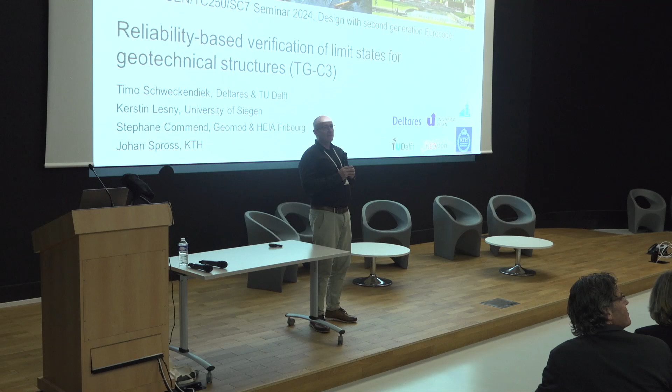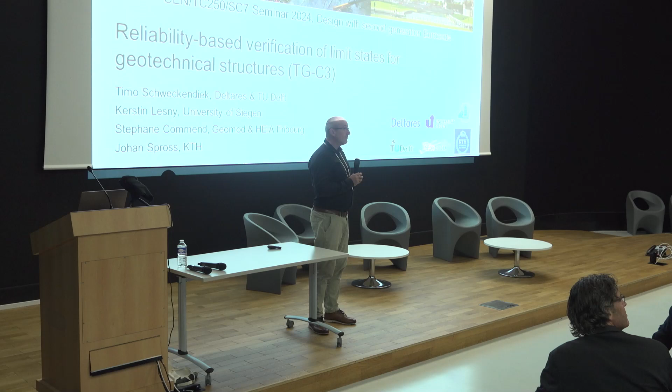We would also like to know who we have in the audience, at least the groups of professionals you represent. Please raise your hand if you are a designer or working at an engineering company. That's at least half of you, I think. If you work for a contractor or construction firm, also good representation. And maybe academia, research organizations, about the same as contractors, interesting.

Another question to follow up: who of you has not so far been involved with the writing and developing of the next generation Eurocodes? That's almost half as well. So that's good to know for us, that we really have engineering companies and contractors here, and also people who haven't heard the story before. It makes it even more important for us.

All right, let me show you how we're going to do this. I'll give you a general introduction to the topic and the contents of the guideline, and then we will take you through a design example, intermittently giving you more detailed contents of the guideline.

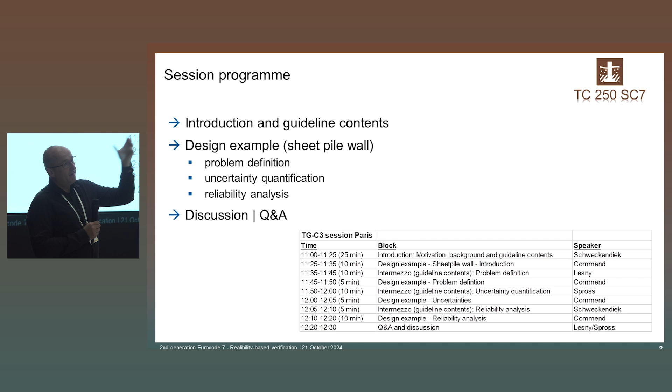That's what Johan and Kerstin will do, and then Stephane will tell you, based on the example, how we dealt with those specific tasks, like defining the problem, uncertainty quantification, doing the actual reliability analysis, and so on. In the end, I hope we have time for some questions and discussion.

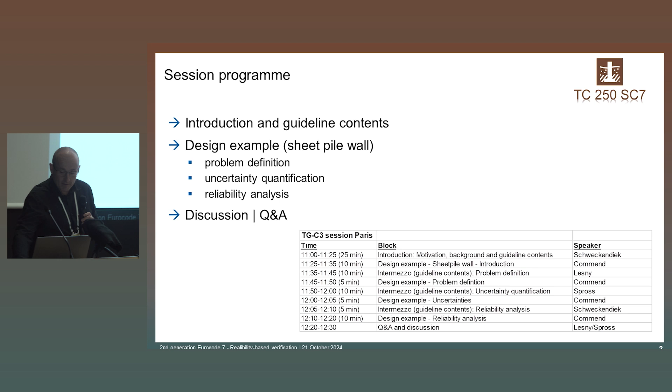So let me jump right into the topic, because we have a lot to tell you about the motivation, backgrounds, and the guideline contents. The general background is that we have a lot of uncertainties in geotechnical design and the assessment of structures. We've been talking this morning mostly about ground properties and the ground model, but of course there's more to it.

There's uncertainty in groundwater conditions, uncertainty in the actions, and last but not least, we also have uncertainty in our calculation models. Even though we have quite good information on the input to our calculation models, we know that models are not perfect, and we have to take that into account too.

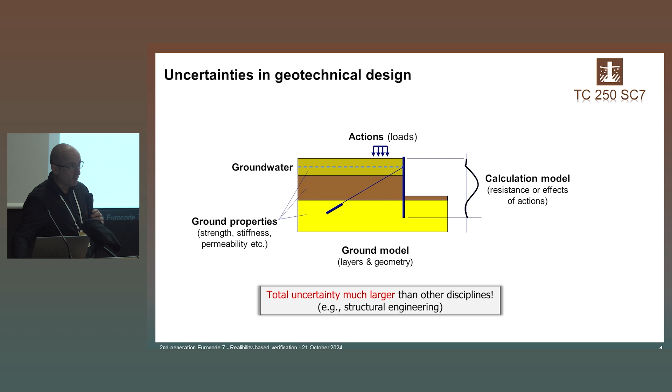That makes the total uncertainty much larger than in other disciplines like structural engineering. As already addressed this morning, we are not working with controlled or quality-controlled materials, but with soil.

In the past, or also currently, there have been and are several ways of dealing with uncertainty. Historically, we've been working with factors of safety overall, so to speak. You do your best guess of all properties, get a calculation result, but then put a factor of safety on the overall result.

Then what we have in the current version of the Eurocodes is the partial factor method, and we will see that it's also related to reliability concepts, because partial factors are meant to cover uncertainties where they actually occur. What we're going to talk about in this presentation is reliability methods or probabilistic analysis and design.

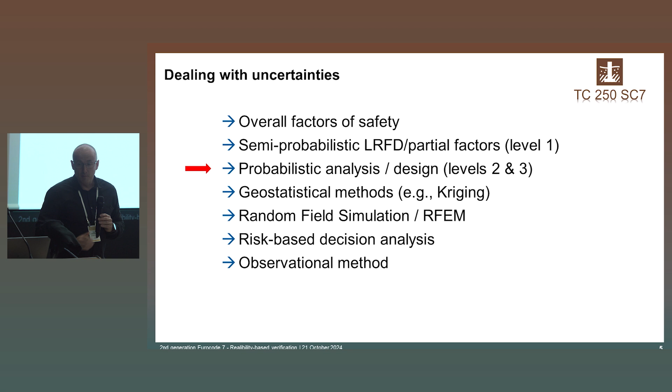There are also other things you can do to cover uncertainties, like geostatistical methods, random field simulation, involving the consequences in risk-based decision analysis, and for example the observational method. But we're going to focus on the red arrow there.

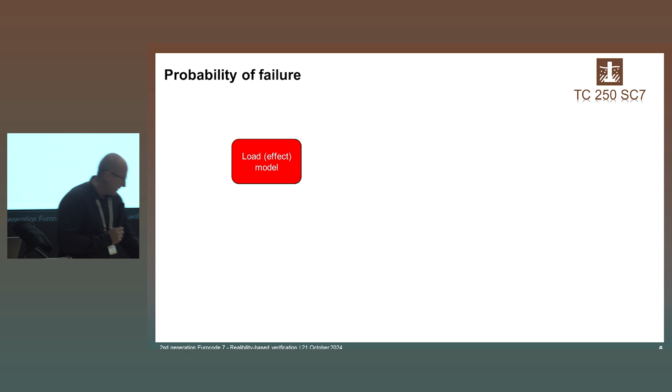To be on the same page on the overall concept, suppose we have a load effect model. In this case, as shown earlier in the picture, we're calculating the bending moments in the sheet pile wall. That calculation model has a number of input variables, and in conventional design with the partial factor method, we would feed that model with design values or representative values depending on what you're calculating.

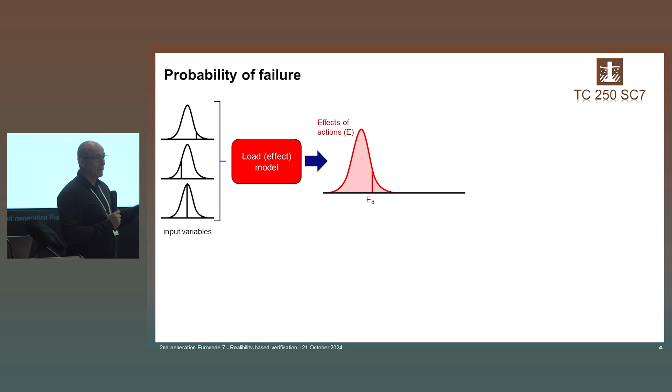But in a probabilistic analysis, we would give as input probability distributions to represent the uncertainty in those quantities—could be ground properties, geometrical properties, whatever is relevant. What you get from the probabilistic analysis essentially is the uncertainty in the outcome, in this case the uncertainty in the effects of actions, the uncertainty in the bending moment calculated, and in a conventional design you could also get the design value from that.

Similarly on the resistance side, you may have a resistance model, in our case for the sheet pile wall, that may be just, for example, the yield stress, but could also be a more complicated model that involves several variables. You could similarly calculate the uncertainty on the resistance side, and then that would allow us in combination to get an uncertainty in the system response, or in the factor of safety, or in the safety margin.

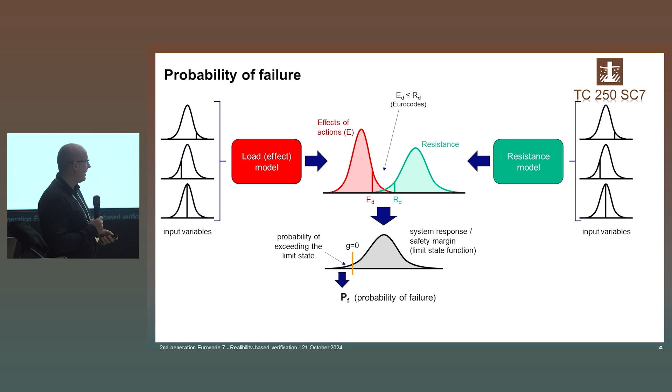In a reliability analysis, we would look at the probability of exceedance of the limit state, where the safety margin is 0, or where we go to a factor of safety below 1. That probability of getting to failure, to an undesired state, is the probability of failure. We can also express that in terms of a reliability index. Don't look at the formulas, that's not for now. But these will come back in terms of the reliability requirements later in the presentation.

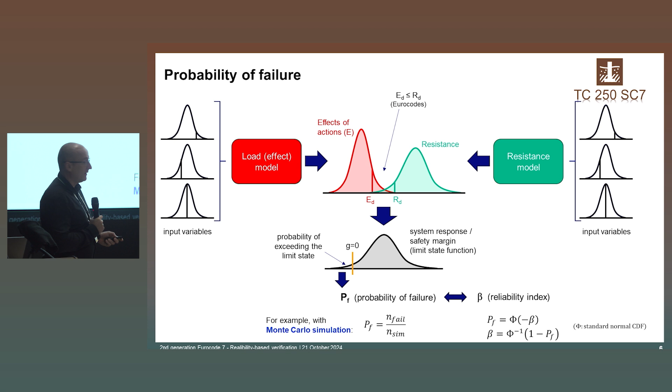If you look into the backgrounds of the Eurocode series as a whole, there's also a whole reliability background to it. There is another guideline, not ours, on that specific topic: the reliability backgrounds of the Eurocodes. It's also pending publication. What I extracted from that is that you have essentially four levels, or types, of design that you could make.

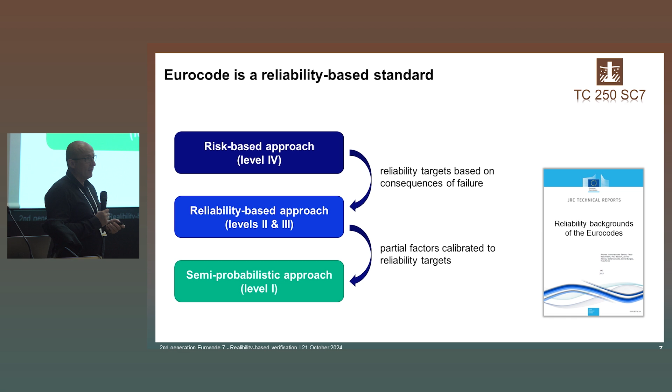You have the risk-based approach, the reliability-based approach, and the semi-probabilistic approach, or the partial factor method. In risk, you look at probabilities and consequences to assess risk. In reliability, you look at whether your reliability is sufficient. The partial factor method is the verification as we know it. But the relation between the different levels is that the partial factors are there to ensure we achieve a sufficient level of reliability, and the reliability targets are based on the consequences of failure, to derive from that an acceptable probability of failure.

Now we've seen the rearrangement of the Eurocodes, no need for me to go into detail on that. There are just two important things. One is that in the new EN 1997 part 1, we will have a specific mentioning of reliability-based methods, as shown this morning, and I'll show you in a moment. The other, which will come back in examples I'll give later, is that EN 1990 part 2 will also address the assessment of existing structures, a particularly interesting case for the use of reliability-based methods. We'll come back to that.

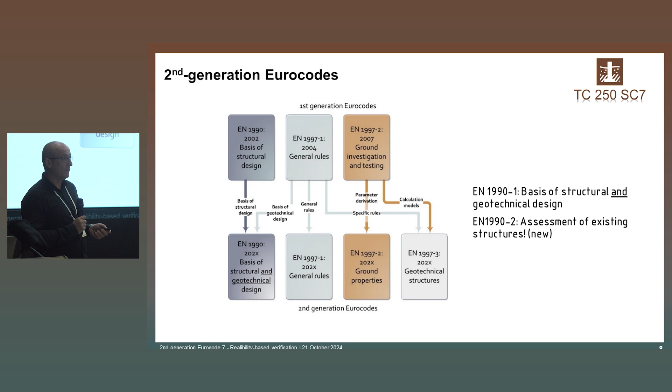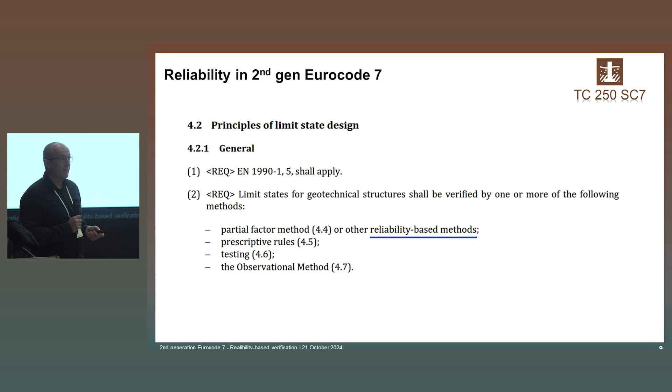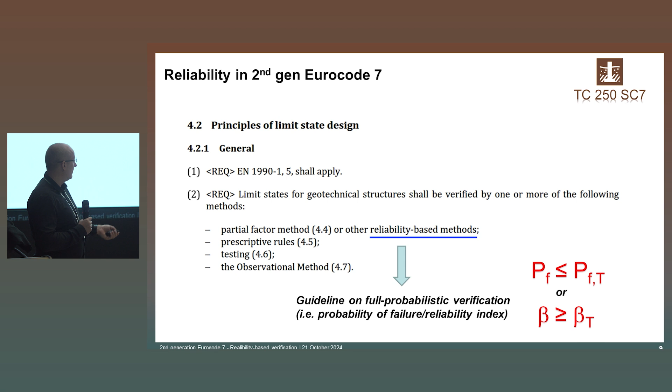In EN 1997 as published now, here I show you the same sentence that Adrian showed this morning: limit states for geotechnical structures shall be verified by one or more of the following methods. Besides the partial factor method, there are also reliability-based methods mentioned. You can see that all the other methods have a reference to different clauses or paragraphs in the code, but reliability-based methods do not. The reason is there isn't much more said in the code about how to deal with reliability methods in design or assessment. So that's why there was a need for a guideline, the guideline we've produced, for full probabilistic verification of limit states in terms of probability of failure or reliability index.

So we had a little competition with the four guidelines here, and I think we may have won two of them: we produced the most number of pages. Not sure if that's something to be proud of. The thing is, this is a relatively new topic and we had to give a bit more background than the others, I suppose. The other competition was who would publish first, and we're the first to get notified that we're ready, so the document should appear maybe this week, hopefully. I thought I would get an applause for that.

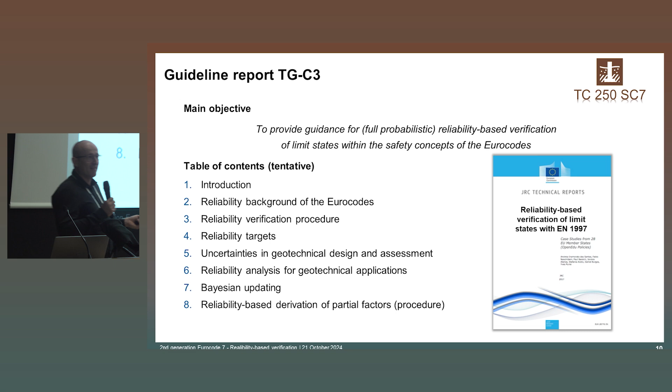So into the reliability verification procedure. There's a couple of things that are just like in a normal design situation. You just take a couple of different approaches there.

In the problem definition stage, you have to define what we call in reliability based methods the limit state function—how you assess whether there is failure or you are in the desired state of the structure, whether you're okay or not. And the underlying calculation models.

You have to assess the ground model as you would normally do, but within there you would also have to choose which of the quantities are uncertain and relevant for the problem, so we explicitly have to look at them in probabilistic terms and, for example, do statistical analysis on them.

Then you have to establish your reliability requirements. You can assess that reliability index, but you also need a target value to adhere to. That's what happens in that first stage.

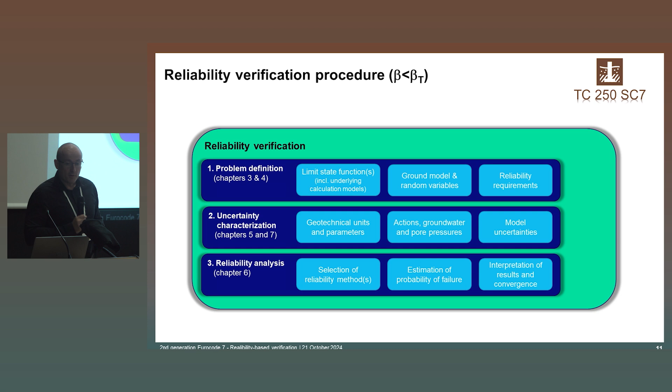In the second stage, you go through uncertainty characterization into the topics mentioned in the beginning: the geotechnical units and parameters, the actions, the groundwater and pore pressure conditions, and also the model uncertainties involved. And then in the third stage, you select the reliability method.

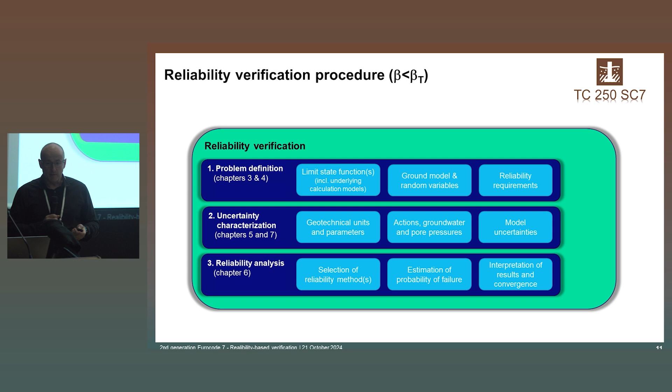You estimate your probability of failure, and we give some more material on checking your results and making sense of the results of the analysis. In the end, you get a reliability index out of the procedure, you compare it to your previously established target value, and that is your verification.

What are typically the benefits, talking from the experience that we have from projects working with reliability-based methods? We can often achieve more cost-effective designs.

You can have extension of or substantiation of residual service life of existing structures. You can substantiate, for example, the safe change of use of existing structures—I'll show you with some examples what I mean by that. And the results can directly feed into risk management and maintenance because you have more nuanced information than just okay or not okay.

And how do we get that? Typically it's by a more accurate way of assessing reliability compared to the generalized design approaches. You just have to imagine that the partial factor sets that we use are used for such a wide range of conditions and structures.

If you go into more detail, sometimes you just overshoot with the safety that you have, and sometimes you undershoot with the safety that you have. And if you can look into that with more detail, you can get a more accurate estimate.

You avoid over-conservatism in many places where you would stack a lot of cautious choices, and you have the possibility to incorporate performance data or monitoring data by using Bayesian analysis. That is, for example, using the information that a structure has survived certain load conditions, which is harder to do in another setting.

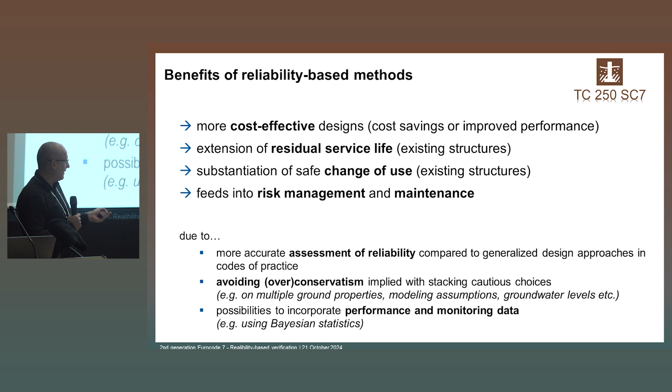To give you some examples, for the Netherlands, where I come from and have worked in the field of flood defenses for a long time, our motivation to get started with these techniques was that we had a new code, and the safety requirements were actually presented and formulated in terms of acceptable probabilities of failure or flooding for the different flood defenses, as represented by the colors here on the map.

And we developed a whole set of tools and guidelines which would allow for the use of probabilistic analysis to assess those probabilities of failure or flooding of the different parts of the flood defense system.

Now, that is not to say we always use probabilistic assessment for this. The reliability-based methods are used side by side with partial factors, and typically reliability-based methods are used when the stakes are high.

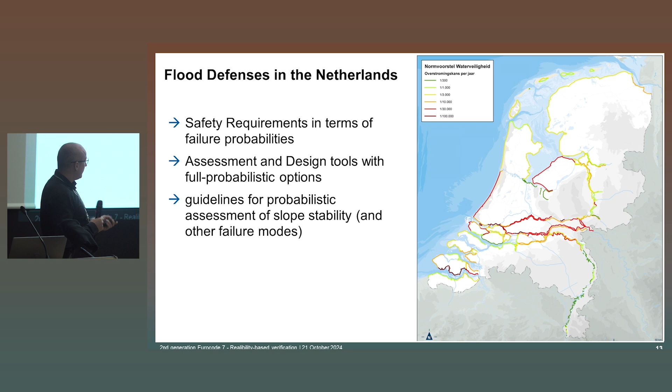So if your normal design produces a stability berm of a river levee that would lead to the demolishing of the adjacent houses, and you really want to have a closer look if that berm is needed, that would be a typical case. So there it's also more the special occasions, but the tools are there.

In other applications, application examples for design are, for example, like with the flood defenses that I just showed—for some structures you just have requirements already stated in terms of acceptable probabilities of failure.

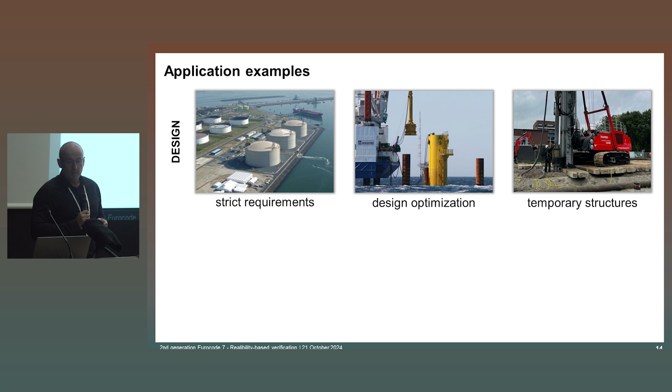Nuclear power plants—in this example we worked on a couple of LNG tanks in the port of Rotterdam, and these structures just had these requirements, and we had to show acceptable levels of risk or probability of failure.

Other examples that you see are design optimization. We've seen examples of monopile design, for example, by NGI, where you see that the length of a monopile can, of course, be a large cost factor, and then you want to really be able to optimize and use all the data that you have.

We've seen examples in temporary structures. Just recently in the Netherlands we had cases where there had to be working platforms for machines, and with the conventional set of partial factors they could really not make the working platforms work.

And then we had a closer look and substantiated a different set of partial factors, and when you dive deeper into the topic you see that the generalized set of factors, as I mentioned at the beginning, sometimes is just way off for what you would need for that particular situation.

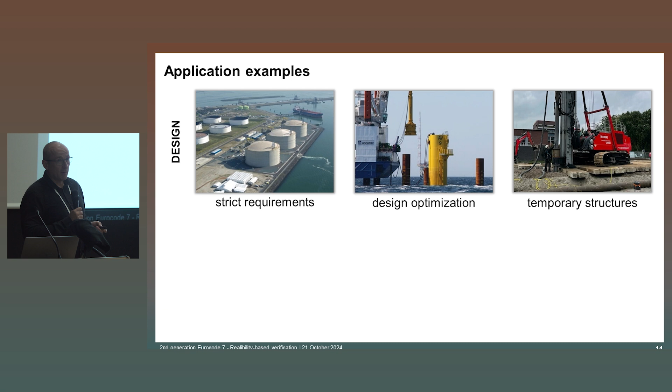Now to the assessment of existing structures, particularly interesting.

One of the clients that we work for is the Port of Rotterdam, with a large portfolio of quay walls. They have a lot of structures approaching the end of the original design lifetime—50, 60, 70, 80-year-old structures, concrete and steel, subject to corrosion. Questions arise about residual service life, safe operation, and often change of use. Can we deepen the harbor basin by a meter, increasing the retaining height? Can we use different loads on the cranes, surcharge loads on the structure itself, and so on?

If you go into that problem, calculating the safety of the structure with a code meant for design of new structures, very often the only thing you can conclude is that we wouldn't have built the thing now as it is standing there, and you don't get any further than that. Because you actually get very low safeties for that existing structure. But does that mean it has no justification for being operated at the moment? How long can you do it? And what about these questions of change of use?

There also the advantages of reliability-based methods of combining different sources of information and performance data come into play.

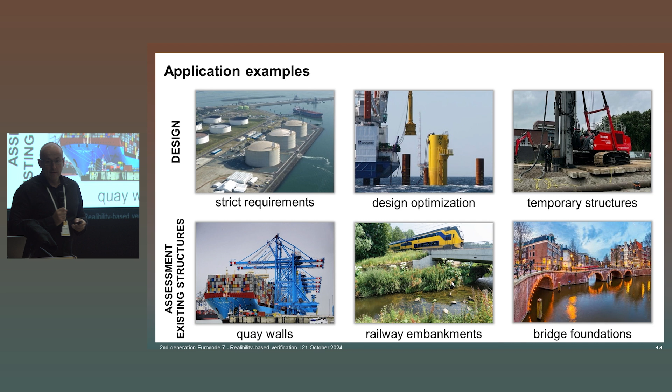So you could say, why look at it at all? Because sometimes they actually collapse, and so questions arise about the safe operation, if they can safely be used in the inner city of Amsterdam. So there we also went with a probabilistic approach to combine data from the whole city on the piles with local information and the reliability-based approach for the safety of existing structures.

Lastly, I want to touch upon the topic of partial factors and their relation to reliability. As said earlier, partial factors are there to ensure a sufficient degree of reliability. I think there are generally two ways to look at it. You could look at it from the empirical perspective—that our partial factors at the moment seem okay because we don't have too many collapses, problems, and failures to adjust anything.

But the other thing is you can look at it from a reliability point of view, especially in terms of where to put the safety. Absolute safety levels may be a different question, but where to put the safety and how much. There are approaches to substantiate partial factors from a reliability point of view.

What you typically do is perform the normal design calculations side by side with reliability analysis, and look at, with different sets of partial factors, how the reliability levels turn out and how you achieve your desired level of reliability. So in the guideline we provide the underlying concepts and describe approaches on how to do partial factor assessment with reliability concepts, which could help national standard bodies in choosing partial factors or substantiating changes in the national annexes.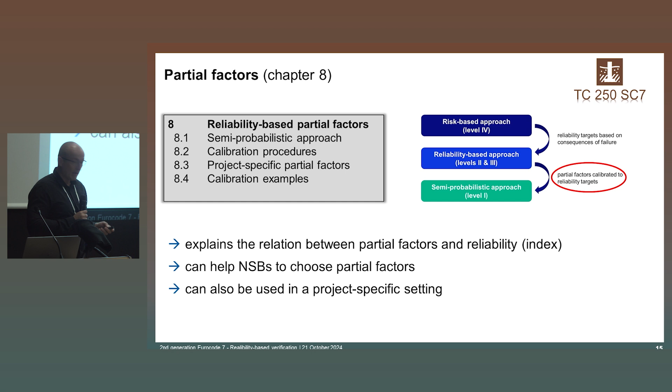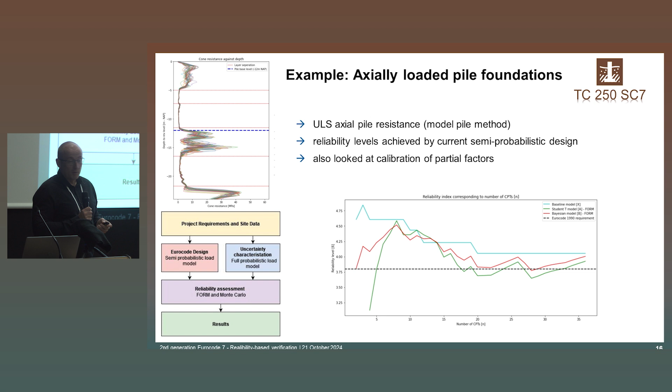In the guideline we have examples on how to do the reliability analysis. Some examples, like this one on pile design using the model pile method with a larger CPT data set from Amsterdam, also show a side-by-side comparison of the partial factor approach and the full reliability version, giving an idea of this calibration of partial factors—which would now be a little too much to go into detail on.

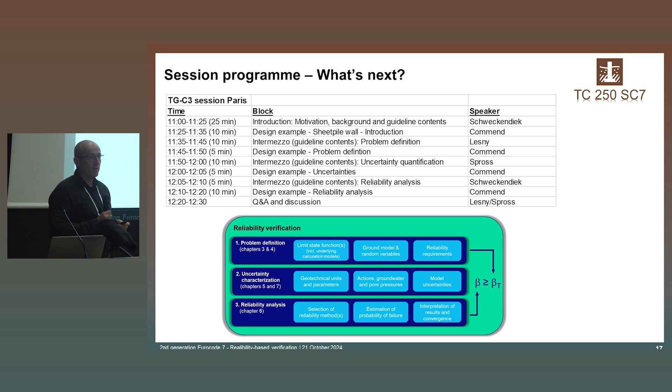Because we want to jump right into the design example that we have. So now Stefan will first introduce the design example for us, and then we will go through it by giving you a block of, let's say, theory or things said in the guideline, what you should do, and then Stefan will come back and tell you how that was used in the example. And as such, we will go through it.